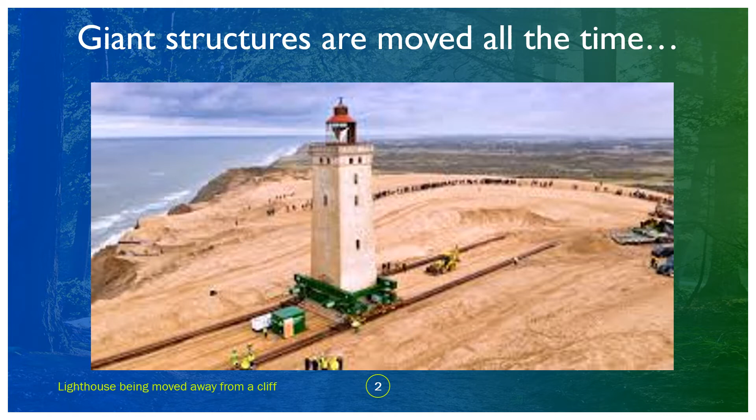Anyway, giant structures are moved all the time, and I want to start the discussion by showing you this. Here's a lighthouse being moved away from a cliff. Obviously, the lighthouse weighs a zillion tons, and it has to be jacked up, then put on a track and moved.

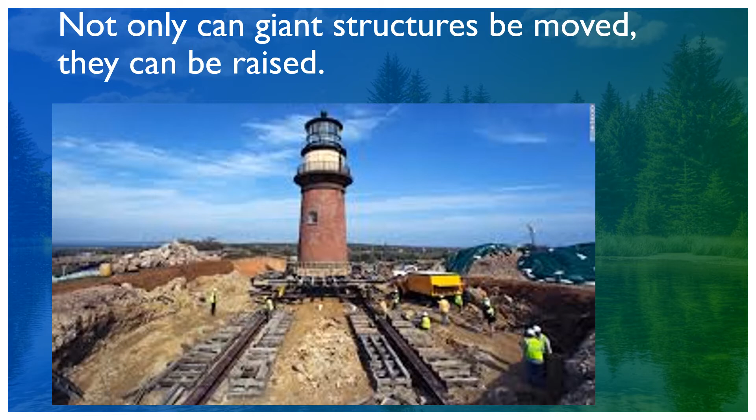This slide shows that not only can they be moved, but they obviously have to be raised to be put on the tracks. This is just another example of a gigantic structure being raised and moved. Here it is again, raising the structure and moving it. The moving is even more complicated than the raising, but again, they're moving it away from a cliff. They have to do it, and it's very possible, which is the point I'm trying to make here initially.

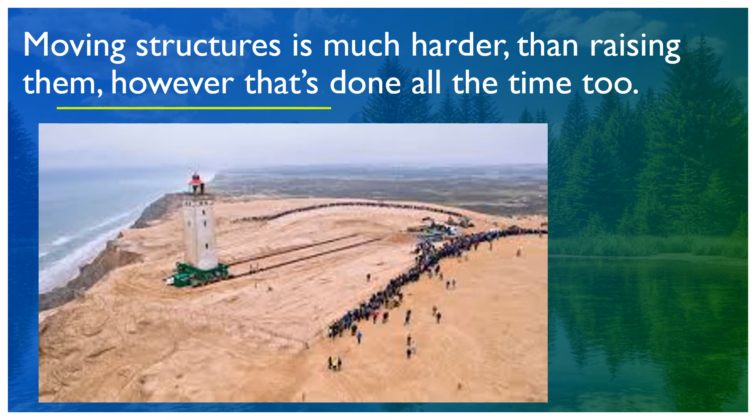The next point is that entire houses can be lifted up, put on lorries, and moved to an entirely different location. We're going to see how they do that, but just understand that it can be done.

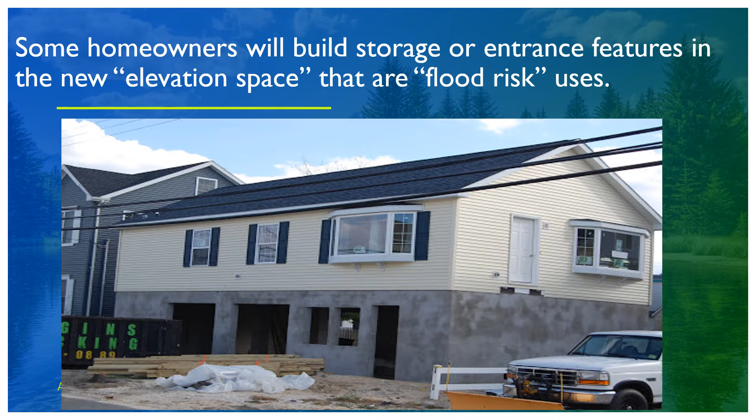Here you see a gentleman who has taken his one-story house and turned it into a two-story house. This may or may not be in a flood area—it looks like it's probably up north because I see the snowplow. But the bottom line is, if it is in a flood area, you can see he's going to have to put stairs up to the entrance on the right. The lower areas won't be useful for living areas because if it is a flood area, all he's done is protect the upper part of his house. If it's not a flood area, well then obviously he can use that lower area.

But for our purposes, if this was done—and you're going to see that it can be done—those garage areas could be used for cars.

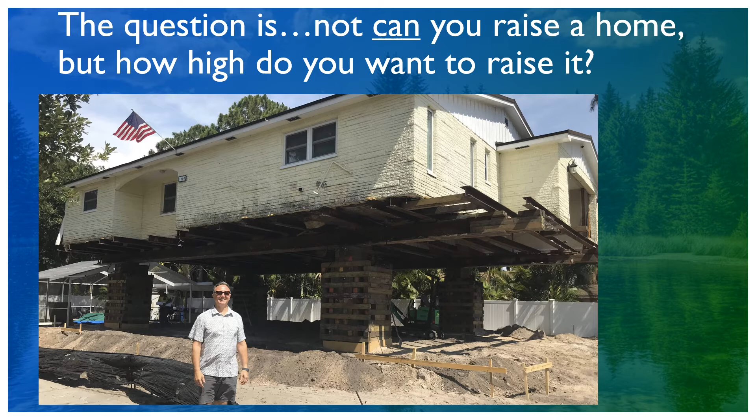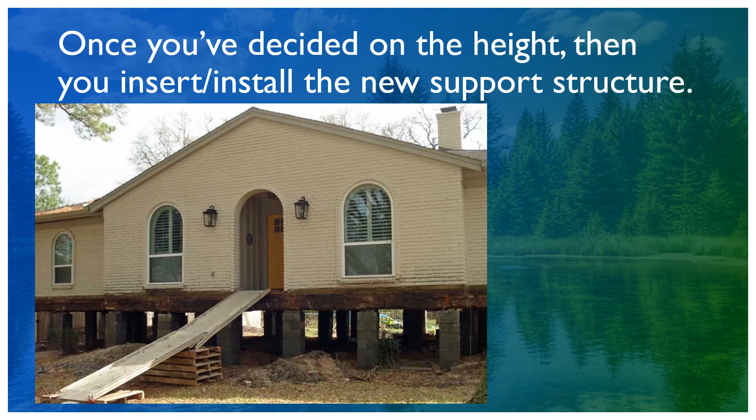This is the next stage where the supports are put in underneath the house. Obviously, this house hasn't been raised as high, but it is raised nonetheless. This is one of the three options that you can use for raising your house and putting the structures in underneath. We'll go to the next step here, which is to basically enclose those support structures.

Now, as you can see, the front door is 6 feet up, and you'll need to address that. But the living areas for this house are now up and away and out of danger of any flooding. You can see obviously the elevation of the ground around it has not been raised. Anything, cars, anything like that would still have to be addressed. But we're moving forward now, and we've enclosed the house.

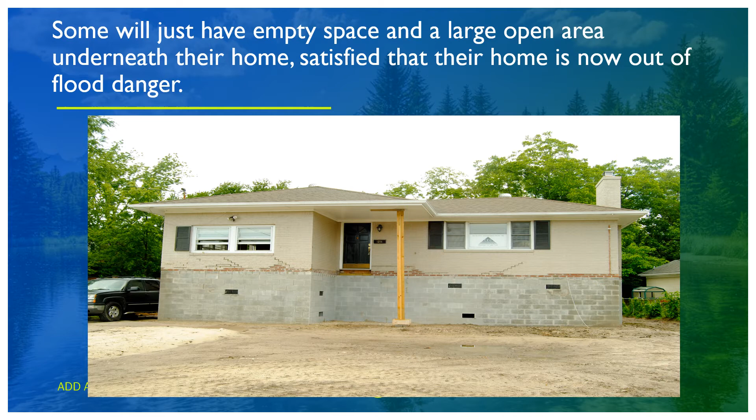So once that gets done, it will look like the next slide. Here you go. That is the finished product, where you can see it almost looks like the house was built to be up like that, except for the stairway going up to the front door.

You probably would never know that that house was lifted up and that there were supports put up inside underneath that house. You can still see in this picture that the garage, or the driveway, is still at the old level, which would put the cars in danger.

Now you could put some racks up there and surround it with landscaping, or you could bring in fill and raise the whole yard. But in order to protect the living areas, the owner of this house has done just that. So he would not have a flooding problem anymore for the contents in his house.

What are the costs and the three types of elevation options? For an average home, between $18,000 and $80,000 to raise it. Now, most homes in Surfside are probably not average. They're probably bigger than average, but this is just to give us a beginning point to have the discussion. This is a 2020 cost estimate, and the estimates go from $18,000 on the low end to $80,000 on the high end. And again, that's just for your average house.

There are three different types of ways to raise your house: pier and beam, column post, and pilings. And we'll go through those three quickly right now.

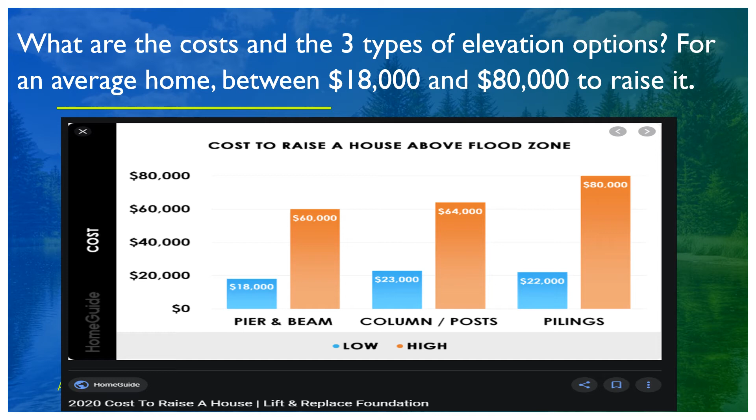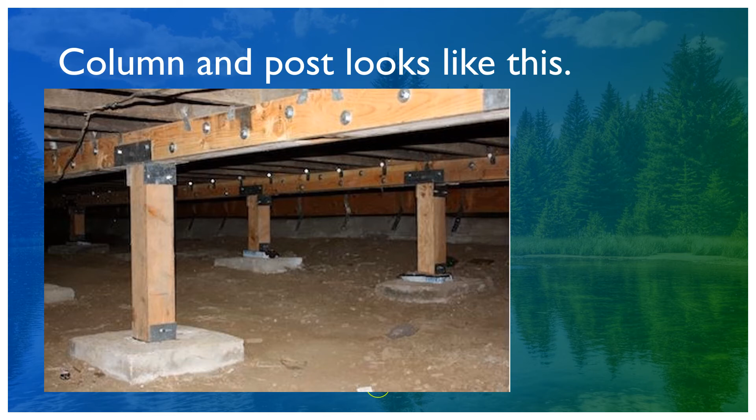Here's the column and post. You can see that basically the house, the older brown wood on top is the bottom of the house, the joists supporting the floors, and then you see new beams underneath there, and those beams are attached to the old joists, which is a hurricane thing, so it's all one piece and very strong. You can see the piling structures there going down to concrete slabs, which would be poured underneath the house. You can see that it's enclosed all the way around, and that's a very, very possible option for residents in Surfside.

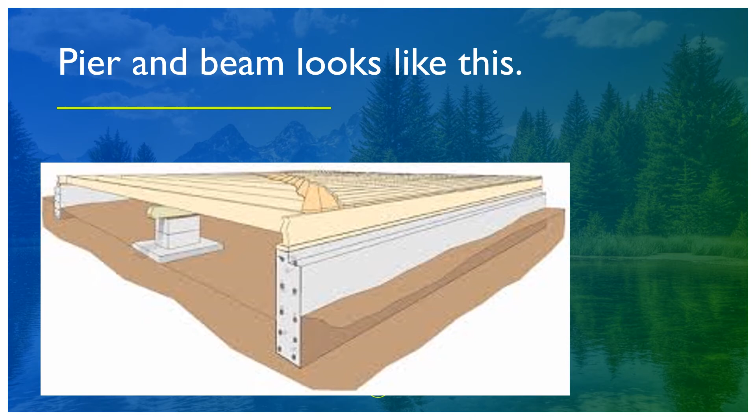What are the cost savings for raising a home besides the increase in value? Of course, the minute you raise the house and get it out of danger so it's not a flood risk, the value goes up. But also your premiums for flood insurance go down depending upon how much you raise the house.

Lastly, how can the town of Surfside help its residents? My plan is that we should offer residents who raise their homes the following incentives to do so. These terms would be available to any homeowner in Surfside for a loan up to a maximum of $35,000.